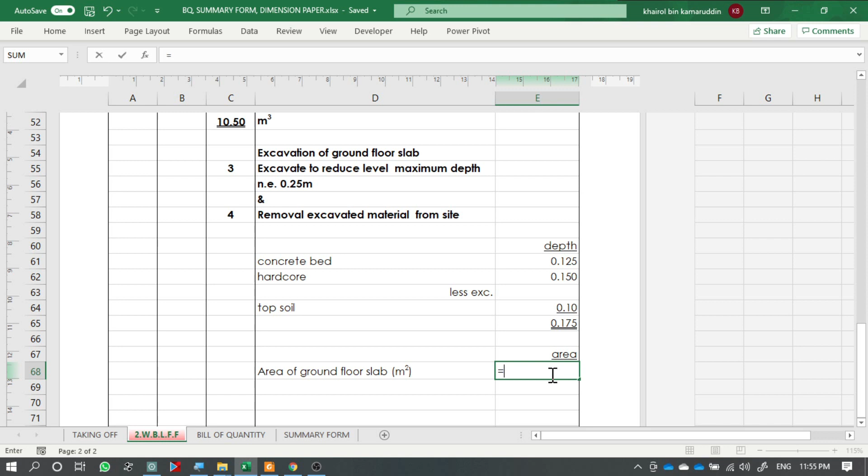Next, we have to identify the area of the ground floor slab. So as I mentioned earlier, the area of the ground floor slab is equal to topsoil area. So now our area of ground floor slab in meter square is equal to, again go back to the area of the topsoil excavation, which is here. Done.

Go to dimensioning column. What we need to do is equal to the thickness of reduced level, and we're gonna times with the area of ground floor slab. Done here. Next, hit equal the depth of reduced level times the area of ground floor slab, and this is the answer.

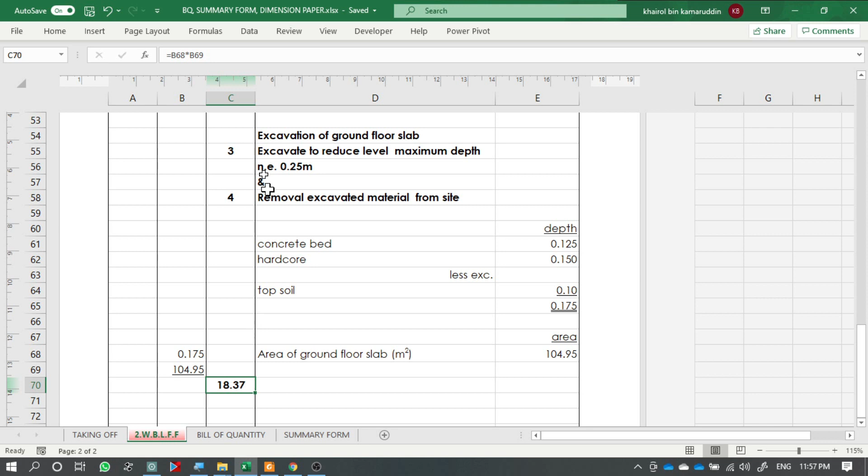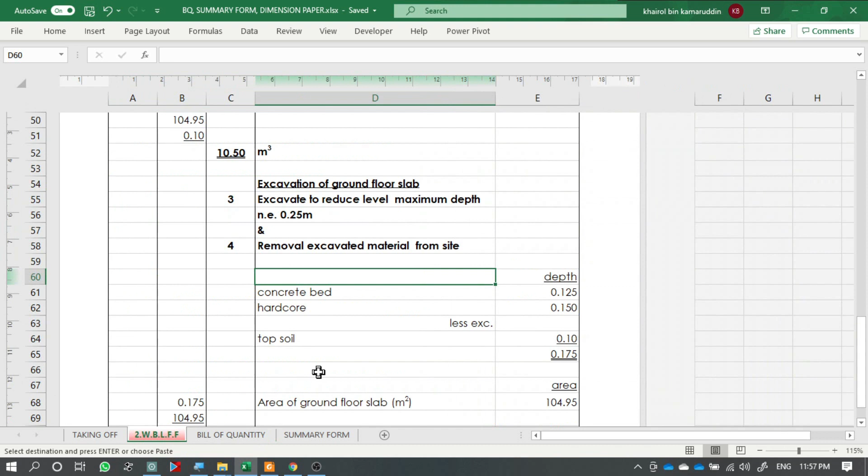Let's move to the second item, which is excavation of foundation. As usual, just go over there and copy, paste as value here, bold, single underline, done. So for excavation of pad footing not exceeding 1.5 meter depth and filling back with the excavated material arising from excavation, what we need to do here, we have to refer to drawing number 4 again.

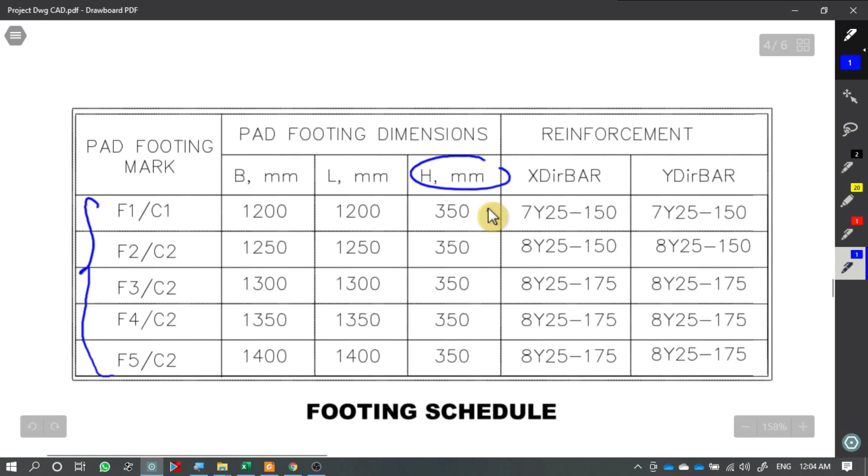mm thickness. Berdasarkan ketebalan pad footing kita tadi, now our task is hit the equal button then fill in with the thickness of it, which is 0.35 meter.

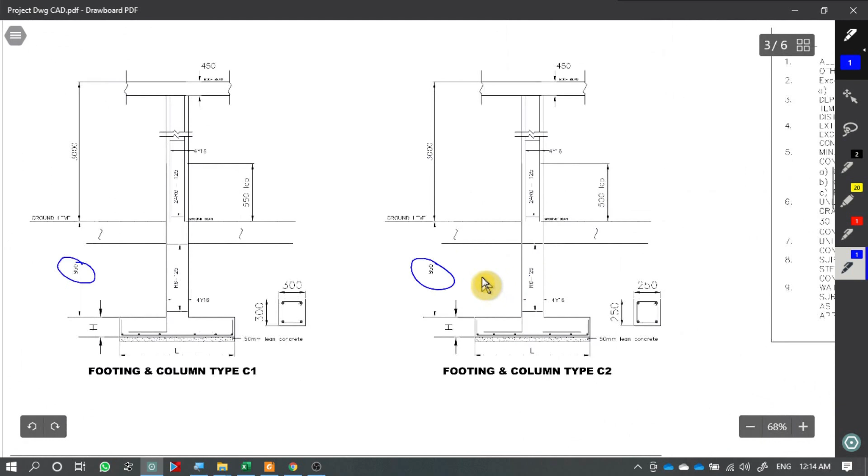Manakala untuk mengetahui panjang dan juga lebar, or length or width for foundation of F1, let's refer back to our drawing, which is drawing number 4, and here refer to the footing schedule. Untuk F1 kita ada 1.2 meter kali 1.2 meter. So now let's hit 1.2, increase 2 decimal places for length, and times width the same thing. And how about the height of that? Now you just need to hit equal and hit 0.98 here. Done for F1. Now, get the answer. Hit equal: 6 quantity of F1 times length times width and times depth. Done for F1.

Now, let's move to F2. But before we move to F2, this is a trick whereby kita akan copy daripada F1 ini ke bawah. But what happens? Yes, 6 maintain, F1 maintain, but the depth is changed. Yang mana daripada F1 sehingga F5 kita akan guna kedalaman yang sama, iaitu 0.98. So, bagaimana untuk kita copy? Even if you select F1, Ctrl C copy, and you paste here, the same thing happens. The value for depth changes to 0. Why? Because when we click here, it's equal to E92 here. No value. Okay, now this is a trick.

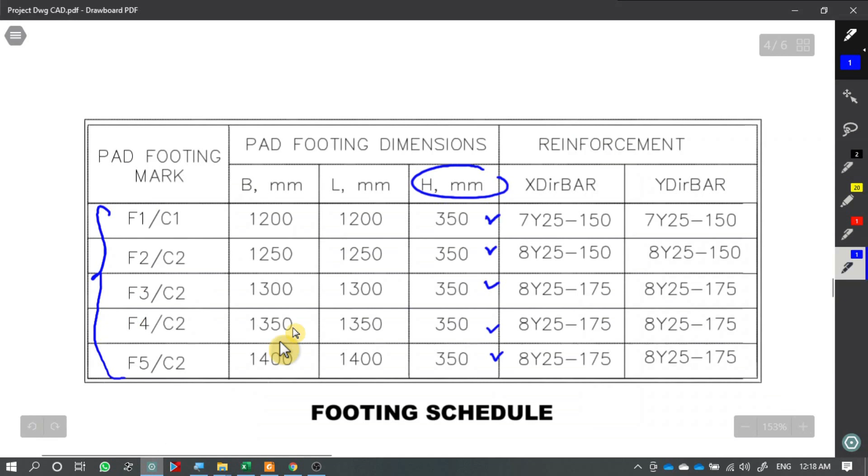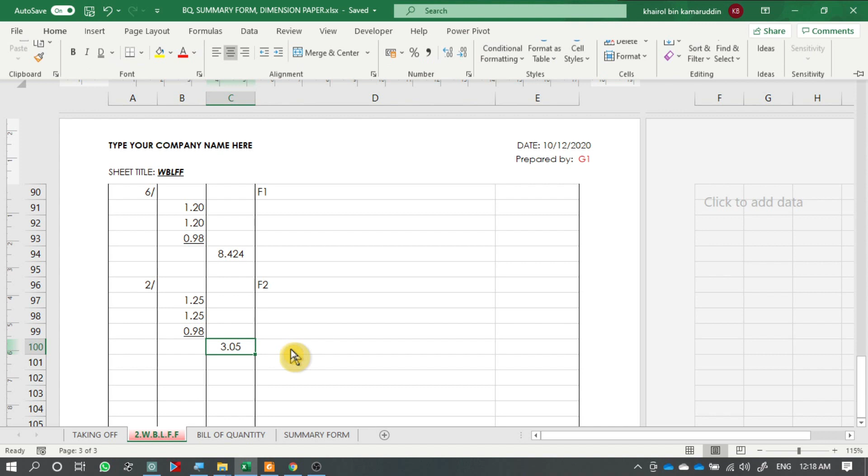1.25 here. Done. So, decimal places, change it to 2 decimal places for F2. So, the same procedure, you can change to F3.

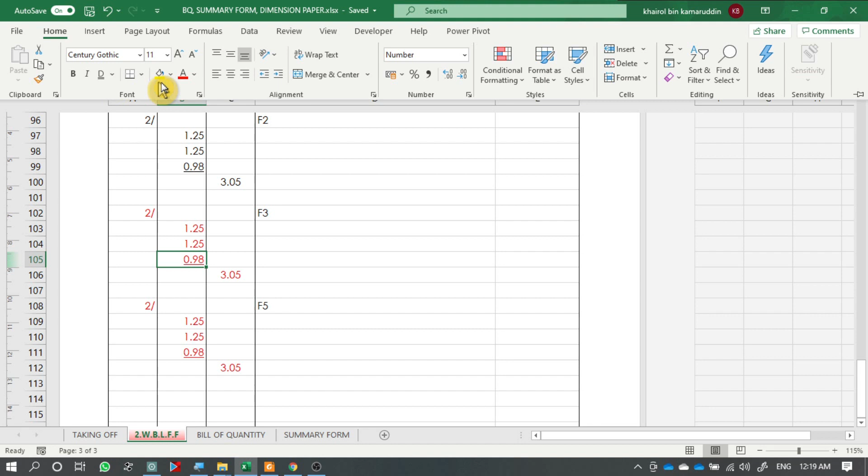Okay, so the same thing here.

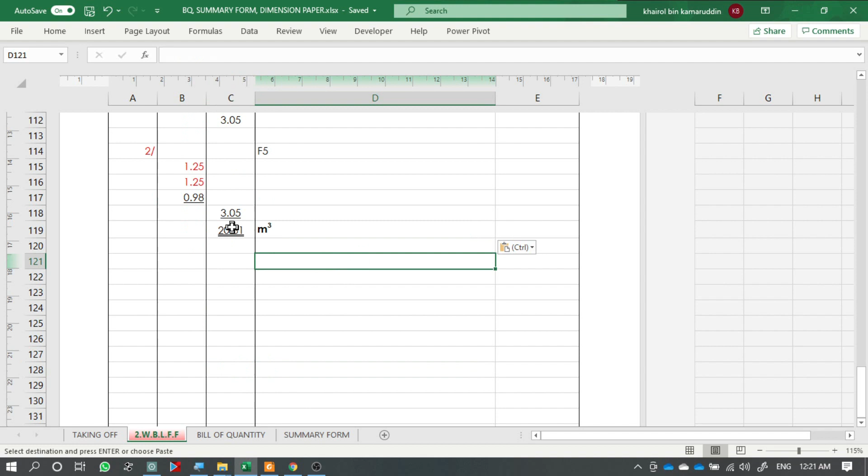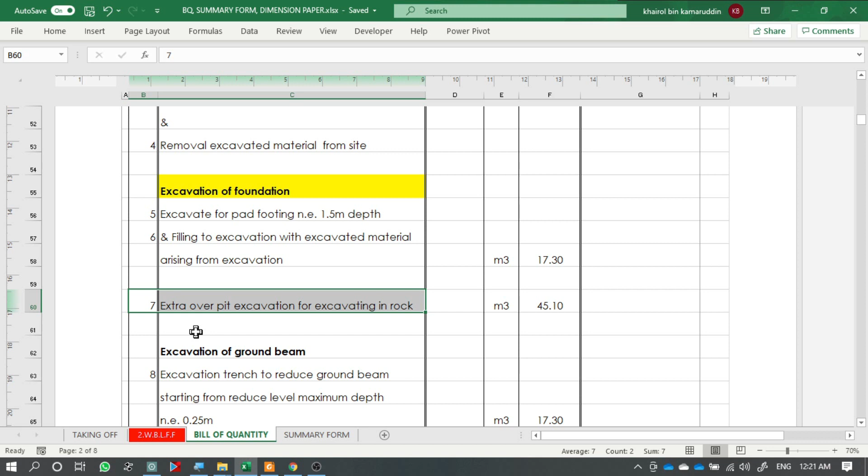Change it to double line, and the unit is meter cube. Now done for item 5 and 6. Finally, we can go to the item number 7, which is extra over pit excavation for excavating in rock. As usual, you just copy and paste here, right click, paste on value,

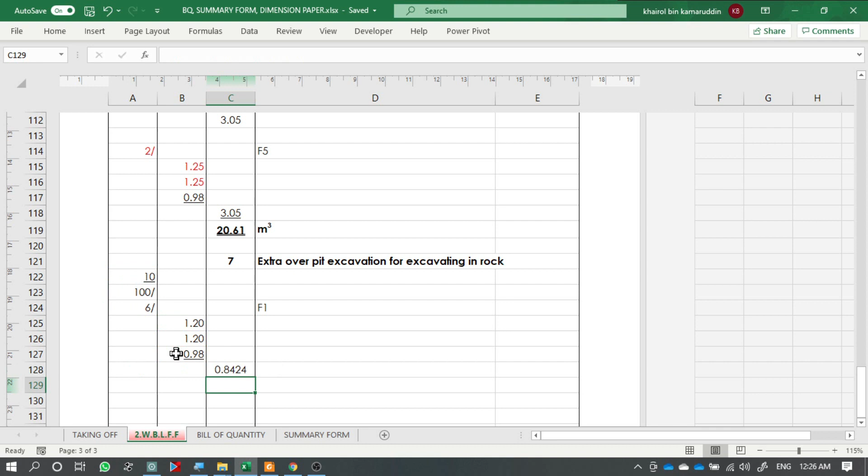But here you have to change the value or the symbol here must be numbers and single line. So 10% is 10 over 100. That means 10% here. So what we have to do is hit equal, 10 divide by 100 times 6 numbers of F1 times length of F1 times width of F1 and times depth excavation of foundation. Change to the two decimal places.

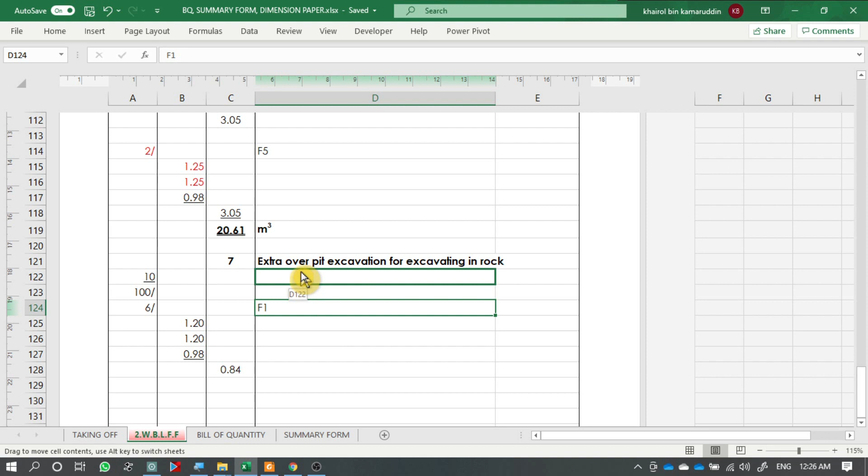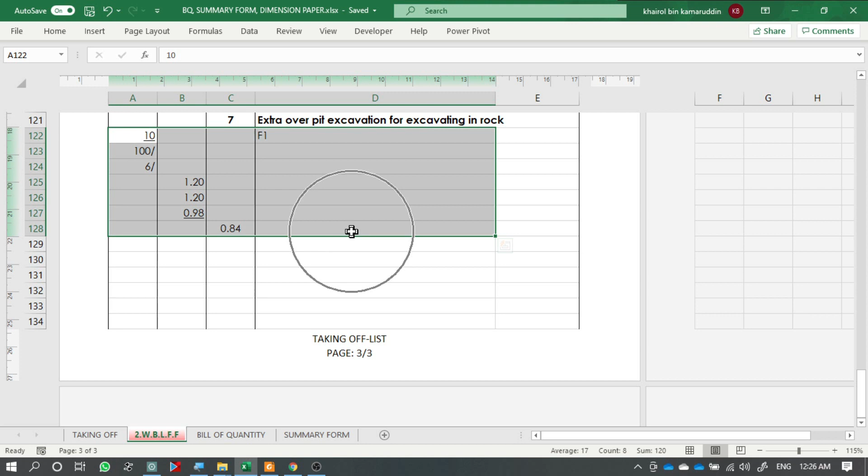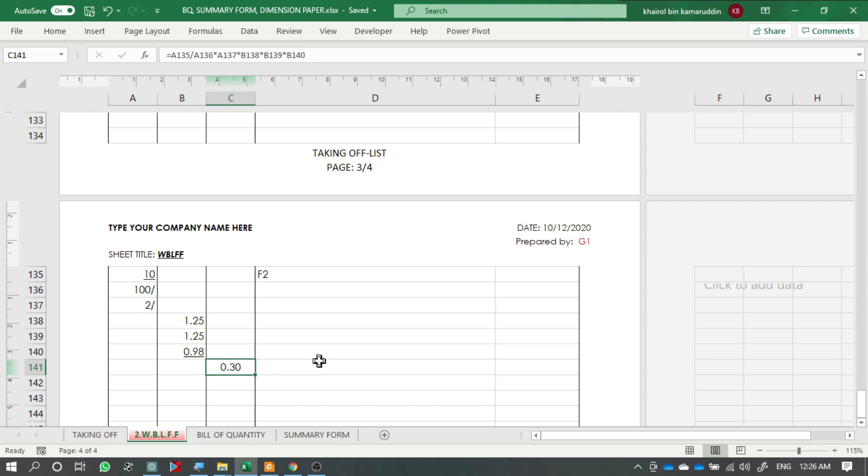Done for F1. Okay, let's move here. Great. So let's move to F2. If you have no place, never mind. Just move to the next page. Change it to F2 and change it to numbers of F2 here. The size of F2 1.25 meter, 1.25 meter, and this is the volume of the rock contents for F2. And the same thing you just repeat up to F5 here.

Just paste, change F2 to F3. You're going to change the numbers of F3, the size of F3, and the answer will be auto calculated for you if you change the quantity of F3 and the size of F3. Alright, so let's move to F4. Same thing. You've got to change the value highlighted here and up to F5. Change F4 to F5. Now we're done.

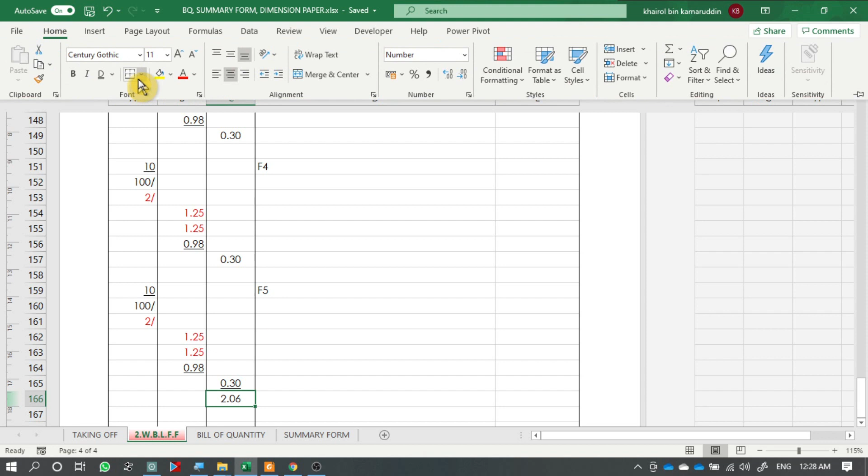So for the extra over pit excavation for excavating in rock, we're done here. Then just close the operation and hit the equal sum. Start from 0.84 up to the volume of F5. Alright, so double line, bold,

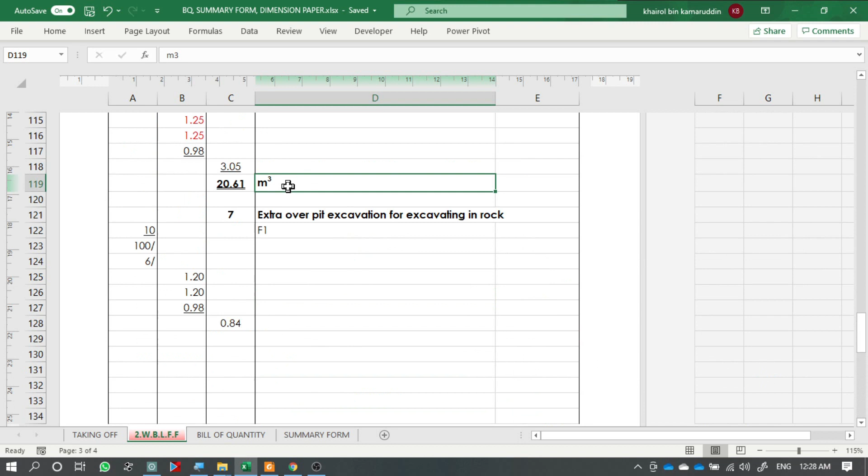So that's all. Super easy lemon squeezy.